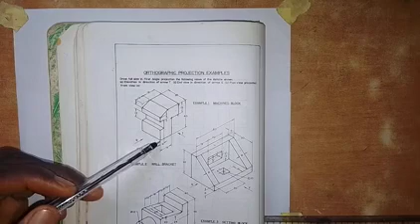Here we are going to produce the isometric view of this object. We want to draw the orthographic views of the object as instructed, but what I want to do first is produce this object as an isometric view. So looking at what we have here, we are going to take this point as the lowest point.

The distance from here to here is 18 millimeters. From here to here, the total height is 40. From here to here is 15. From here to here is 28. From here to here is 18. From here to here is 12.

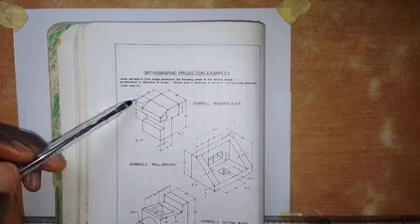To get this point here, we have to take 6 millimeters down. The distance from here to here is 12 millimeters, and the distance from here to here is 6 millimeters, and the distance from here to here is 18.

So we want to draw the isometric view of this object as we see it here. That's what we want to do. So let's start. Let's draw it as we are given. I wanted to increase the dimensions by multiplying its dimension by 2, but let's leave it as it is.

We draw a horizontal line here, and then we take our 30 degree set square, so we draw a line in this direction. What I want to do first is produce this face that we have here, this shape that we have here.

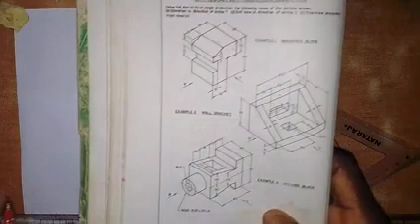Now what I need to do here is draw a vertical line up like this, then I'll begin to take the dimensions. We have that from here to here is 18 millimeters, so I'm going to take a measurement of 18 millimeters here. So here we have 18 millimeters, and I'm going to draw a vertical line at this point.

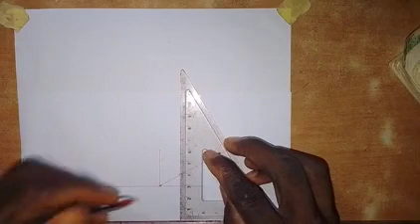This is the vertical line. Another thing I'm going to do is get the total distance from here to here, so that I can get this line. So what do we have? From here to here is 18, from here to here is 12, so that gives us 30 millimeters.

Which means I need to take a measurement of 30 millimeters again from this point. So this is 30 millimeters, and here I'm going to draw a vertical line, like this.

I'm going to take a measurement of 40 millimeters. So this is 40 millimeters, and I'm taking my measurement from 1, not from 0. Then I will take 15 millimeters down.

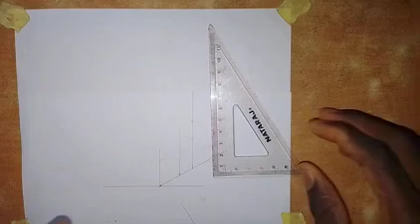So we have 15. What I need to do now again is draw a line. At this point I'm going to draw a line like this. Also at this point I will draw a line in this direction. So I believe you can see this.

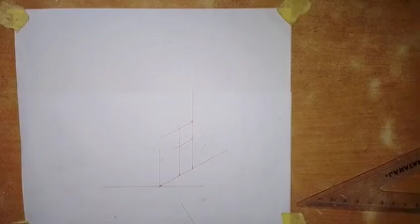The next thing I'm going to do is take a measurement of 18 millimeters here. So I need to extend this line a bit, extend it a little bit, and take a measurement of 18 millimeters from this point. So this is 18 millimeters.

Then I will take 12 millimeters, so this is 12 millimeters here. At this point I'm going to draw a vertical line - at this point here I'm going to draw a vertical line, so the vertical line comes down like this.

Now the next thing I'm going to do here is take 6 millimeters down. 6 millimeters down, so this is 6 millimeters, and I'm going to connect this point together like this.

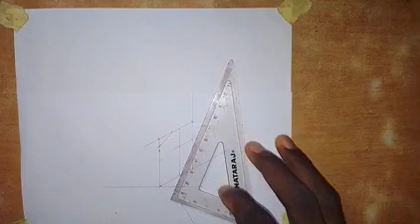Now the next thing I'm going to do is take 6 millimeters down again, as we have that from here to here is 6 millimeters, so I will take 6 millimeters down.

So this is 6 millimeters. So then I will take 12 millimeters down. So this is 12 millimeters. So we have that. So what I need to do here now is...

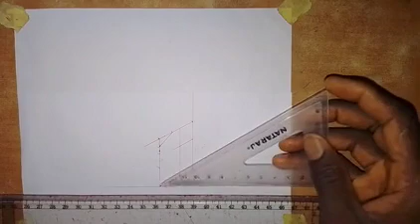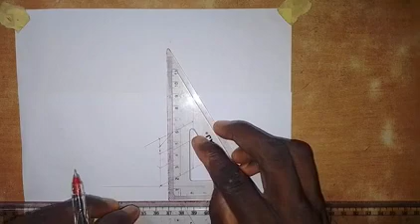Again, so I need to draw this line. So this line goes in this direction like this, and this line goes in this direction. I'm going to take 6 millimeters from this point here, 6 millimeters from this point. Take 6 millimeters, then I'm going to draw a vertical line. So here I will draw a vertical line. So this is the vertical line.

Okay, so looking at what we have here, we have drawn the face that I said we should draw. Let's bring it out so that we can see how the shape looks, so that we can know that we have gotten that particular shape that I said I want to draw first.

So draw this line, make it a thick line. Okay, so make this also a thick line. So we also draw this one. So from here to here, make it a thick line, and then we draw this line down as a thick line, and then this line draws as a thick line.

So this line also we draw it as a thick line, and then we now draw this one from here to here. So we also draw this from here to here, and then we draw this one from here to here. Then we draw this vertical line. So if you look at what we have here, we have brought out the shape, as you can see here on the object. It's as simple as that.

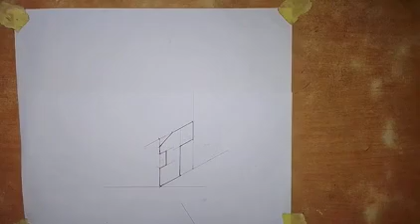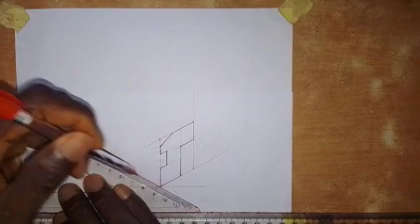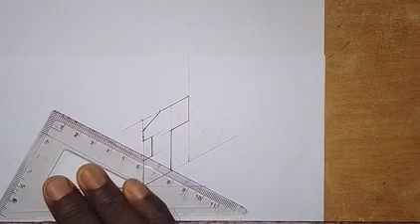So next we are going to do is to get the other part of the object. So what we need to do is to draw a line from this point in this direction. Okay, so from this point also we draw a line in this direction, and from this point we draw a line in this direction, and at this point also we draw a line in this direction.

So coming up here, we draw a line in this direction, and coming here, we draw a line in this direction like this. Okay, so having done that, what we need to do now is that, as we are told that the distance from here to here is 28, we are going to take a measurement of 28 millimeters here. So this is 28 millimeters.

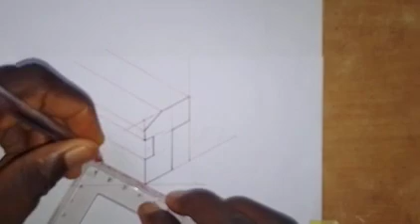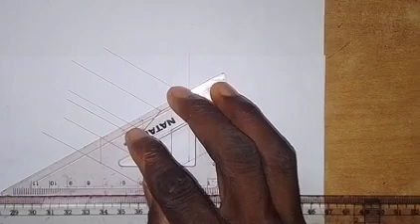So here I will draw a vertical line from here to meet this line. Okay, then at this point I'm going to draw a line in this direction. Then I'm going to take a measurement of 28 millimeters again on this line. So 28 millimeters. So at this point I will draw a vertical line here like this.

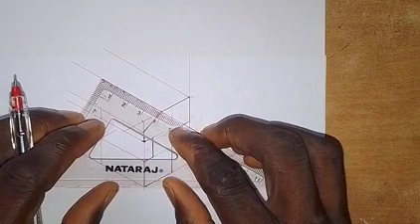Also coming up here, I will take a measurement of 28 millimeters. So this is 28 millimeters here. Okay, so I'm going to connect this point together with this. Then I'm going to use my set square to transfer this point to here. Okay, so we have completed the object.

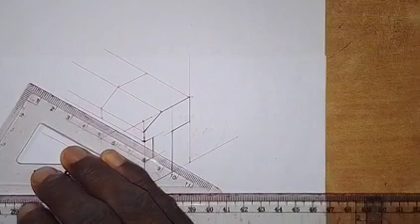So what we just need to do now, again, okay, I should have drawn a line from this point here. I need to draw a line from this point. So from here to meet this line, and then at this point I will draw a vertical line to meet this line here. Okay, so that's it. So the object is out already.

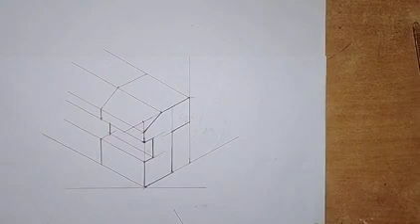So what we just need to do now is to bring out the visible outlines. Okay, so let me pause the video, then when I'm done with the thickening of the edges I will come back. Alright, so this is how the object will look.

So this point is the lowest point. Let's put X here. So that's the lowest point. So look at the object as we see it here, and this is how we see it here in this drawing. Thank you, and God bless you.